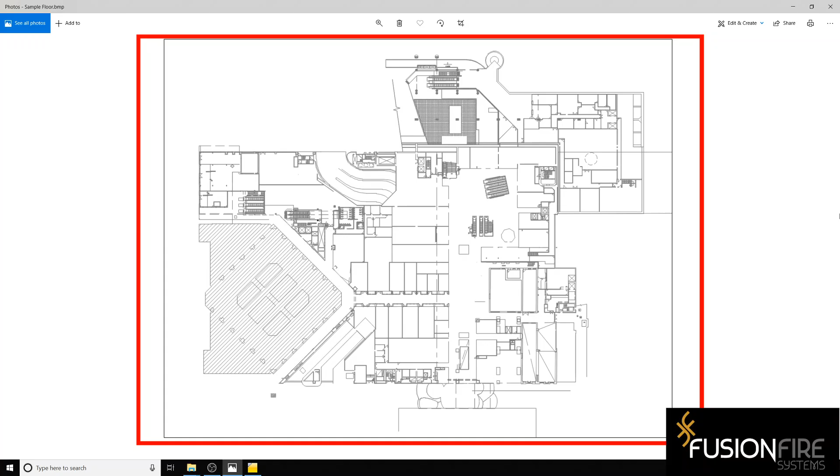So we will start by grabbing this image with Control-Alt-Print Screen, and we will plot it onto this page like so. Now, I always recommend to keep a bit of empty space on your right hand side, because here we may want to have buttons to jump to different sections of the building. We may have a company logo or something like that. In this case, we will probably have a company logo and some buttons.

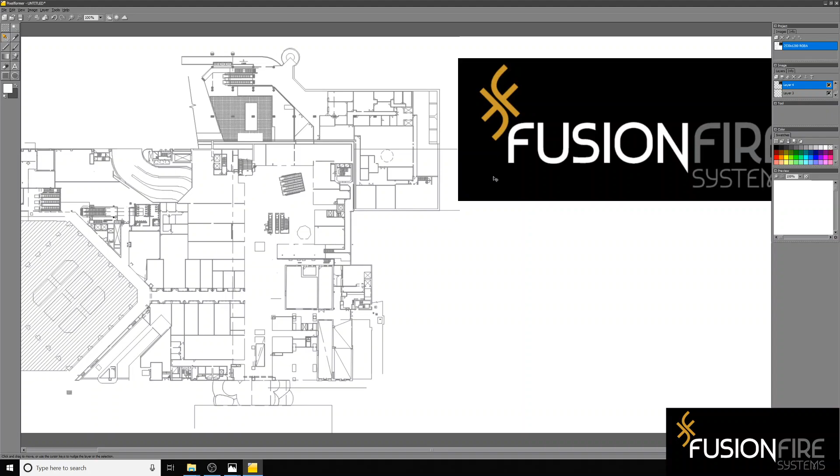So next we will delete any unwanted markups. We'll delete some of these lines. We'll fill this part of the screen, and we can add another layer with our company logo. Okay, so this will be our first map, perhaps.

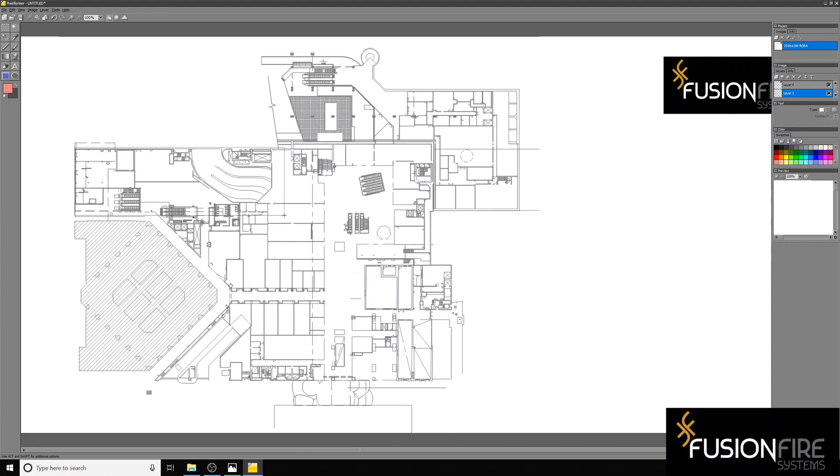Maybe to confirm what we have in each subsection, we can highlight certain areas as specific zones, perhaps. Something like this. So I can set the transparency levels like this. So we have a nice zone here, maybe. Oops. So we can add some zoning somehow.

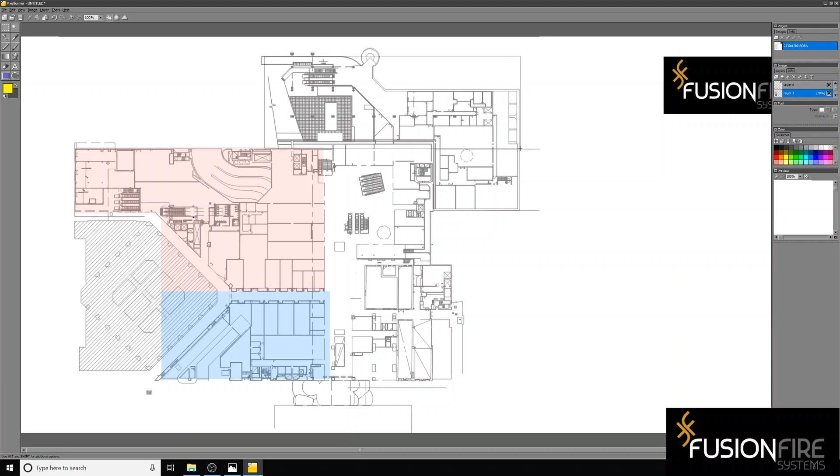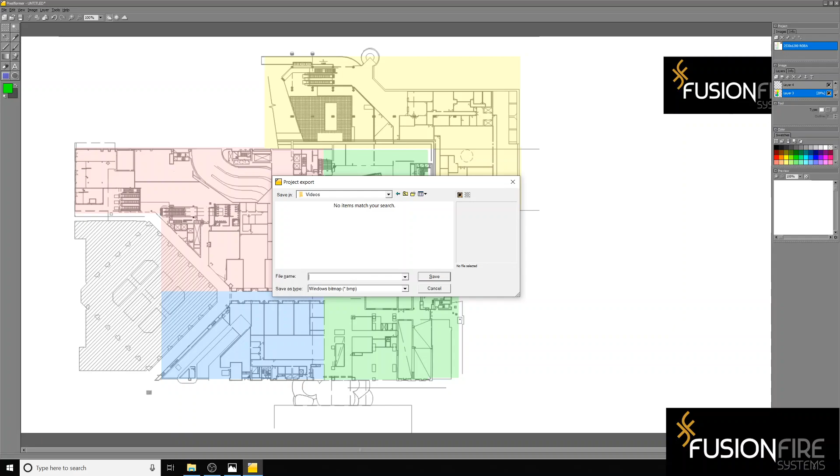Obviously, you can be more creative or do more with other tools. Generally speaking, we can use these as our subsections as well, if need be. Okay. Now we can save this, actually export it as our first file. So this could be, say, main page, perhaps. And then, as an example, we can just work on one sub map.

And then we can get rid of the parts we don't want to see. Let's see. Okay. So now we have two maps to work with. This would be the subsection where we can plot detectors onto, and one main page. That was the one we looked at before, to just have like an overview of the whole floor.

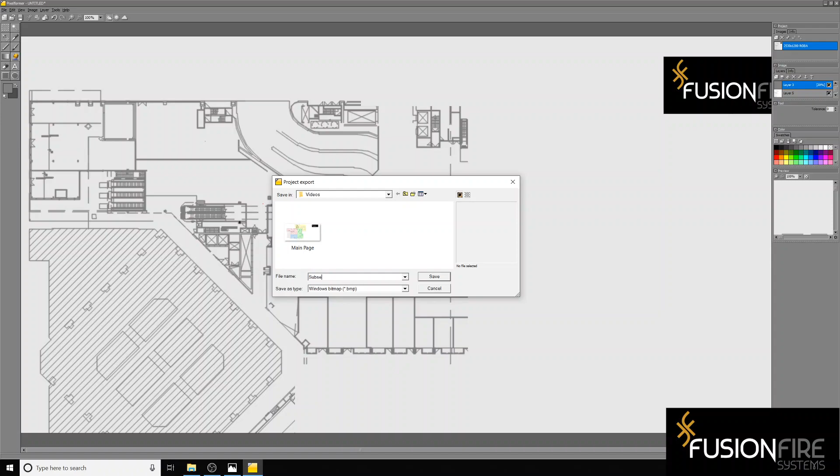Something to keep in mind also, this white background may not provide good contrast with the detectors, with the symbols on the page. So it's possibly a good idea just to have the whole floor a tinge of gray or something like that. Like so. You can choose a color that you like. Yellow is probably not a good idea because it might look just old. So now we export this as subsection 1, and our backgrounds are configured.